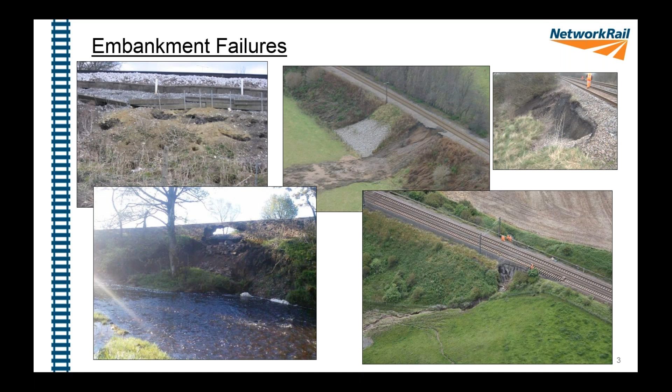Normally I would be able to point and use my hands to show you what I'm talking about, but hopefully you'll get that. So the water came through the cutting and washed out that embankment. Again, I think that was 2012. So those are kind of those examples. We've got some cutting failures, the kind of examples I've got here.

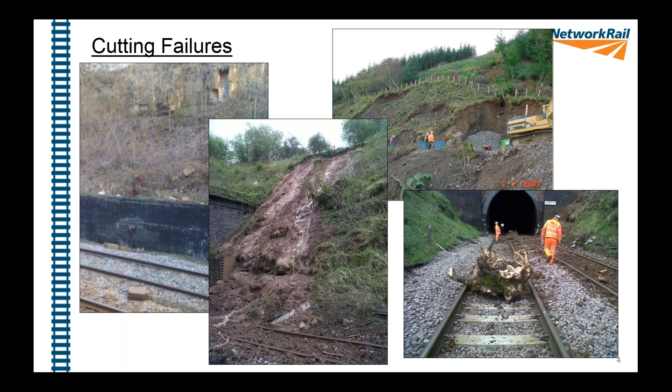So those are safety risks. Obviously, when you have a safety incident, that will affect performance. But there are other issues around performance that maybe we can manage the safety of it, but it affects the performance. So just to remind people about how we measure performance. It combines figures for punctuality and reliability into a single performance measure. And I took this from the website today.

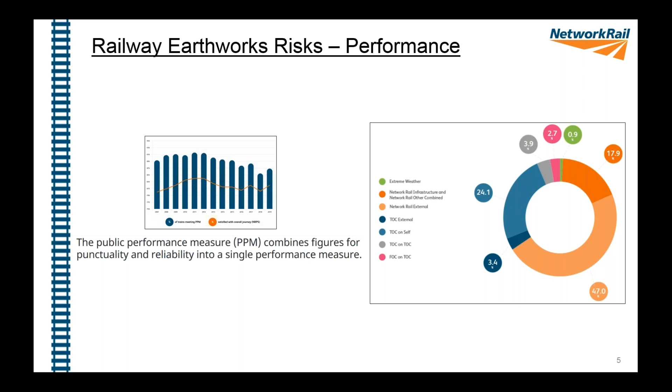So the kind of things that performance impact can be down to that would be part of my world would be extreme weather and then Network Rail infrastructure. So these two definitions here. So when you have extreme weather, that would be exceptional weather conditions beyond our infrastructure design. So typically storm winds could affect us.

The site that was mentioned earlier at Drax, for instance, that was an embankment running through a flood cell. The area around it flooded hugely through February. It was flooded for days and days, but it was flooded during periods of very high wind, and so that caused waves in the bankside, actually causing erosion in the bankside.

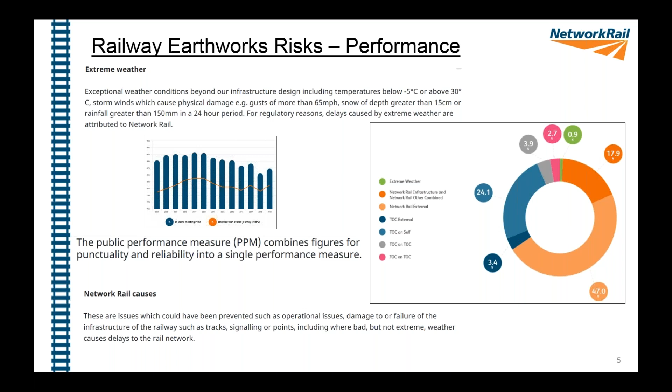So that's extreme weather. And then there's Network Rail causes here, which is to do with failure of our infrastructure. So that's where an embankment may start settling. We can manage it by putting a speed restriction on, like this example here, but the performance impact needs to be managed by my team.

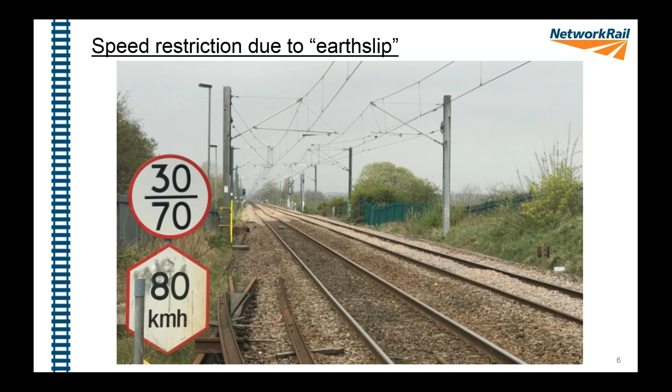And if you think about, okay, you've got these as your assets, how do you manage them? What do you do? How do you count the condition? How do you compare one asset with another? So if you look at that, would you say that's the asset? Would you say that there's two separate assets there?

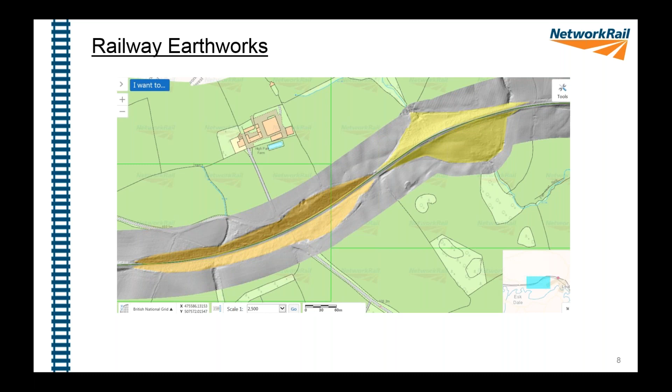Would you say, for instance, that's the whole asset? So it's quite difficult to be able to compare like with like there. So the decision was taken when we were working out how to understand and manage our assets, that we would split them into what we call 5 chain lengths. So that's 100 meters, 110 yards.

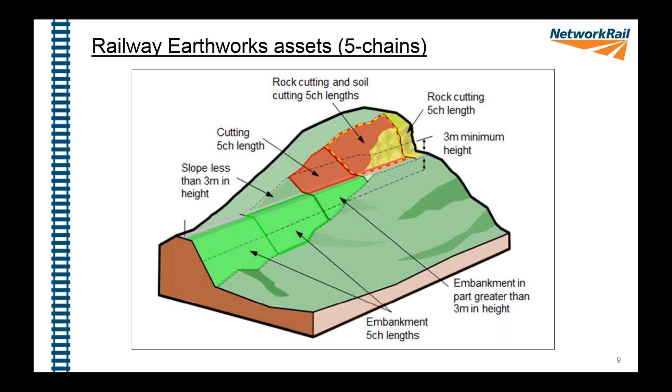We look at them on each of the sides of the railway, and we carry out inspections and gather data on each one of those kind of elements of a whole earthwork, if you like. And that allows us to gather data, to manage inspections, and to manage any work going forward. So that's what we do with those.

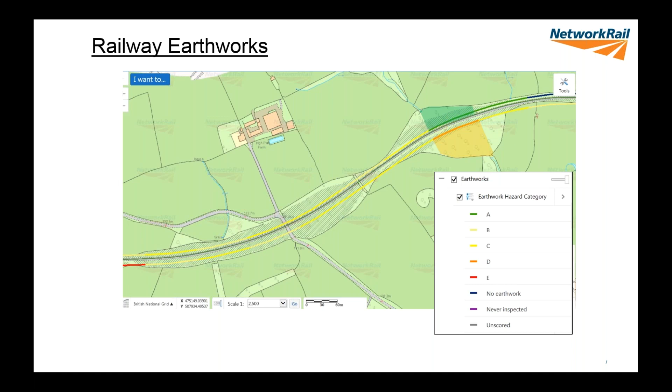And this shows you here how it's split up. So you would go out and do an examination on one of those coloured bits there, and that would be considered the asset. So when I said earlier we've got nearly 50,000 assets, that's what I'm referring to.

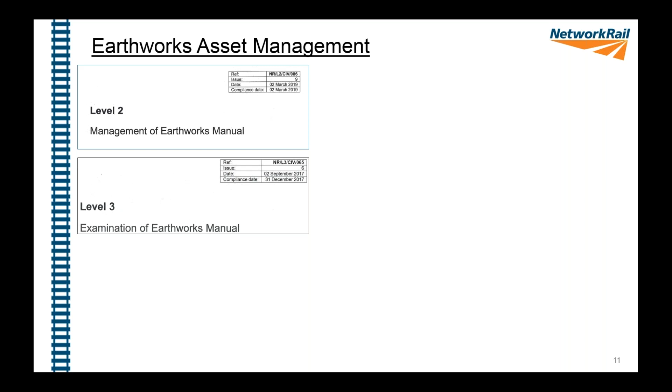So what is Earthworks Asset Management? We've got a management of Earthworks manual, a standard that we work to. We've got an examination of Earthworks manual, and we've got a series of modules that sit kind of within or next to this, which help us manage the risks from our earthworks.

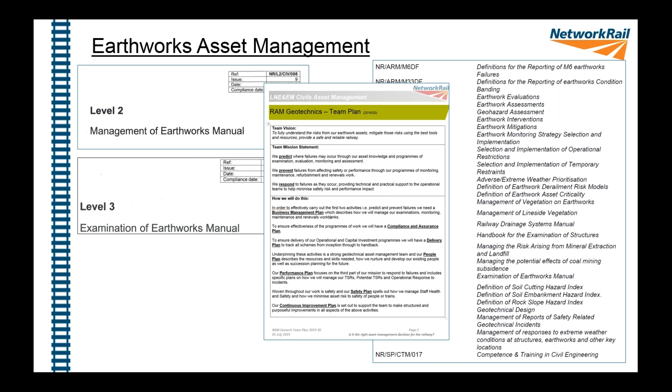In my team in York, we've got what I refer to as our team plan. It's a very high level look at what are we here for and how do we do what we're here for. So just zooming in there, I've got a team vision. My vision is that we will fully understand the risks from our earthworks assets, and we will mitigate those risks using the best tools and resources, and ultimately provide a safe and reliable railway.

And then in terms of our mission statement, we'll predict, prevent and respond to failures in essence. So the idea is that our job is to be able to predict where failures may occur, and we should be able to do that through our asset knowledge, through our programs of examinations, evaluations, monitoring and assessment.

And then we'll prevent failures from affecting safety or performance through the monitoring, maintenance, refurbishment and renewals work. And then thirdly, responding to failures as they occur, providing technical and practical support to the operational teams to help minimize safety risk and performance impacts.

So from my point of view, I keep coming back to this to say, is this what we're doing? Is any work we're attempting to do actually tied back to this? So I'll look at the prediction side of things. In the last couple of years, we've been really trying to work at improving what we do and how we do it.

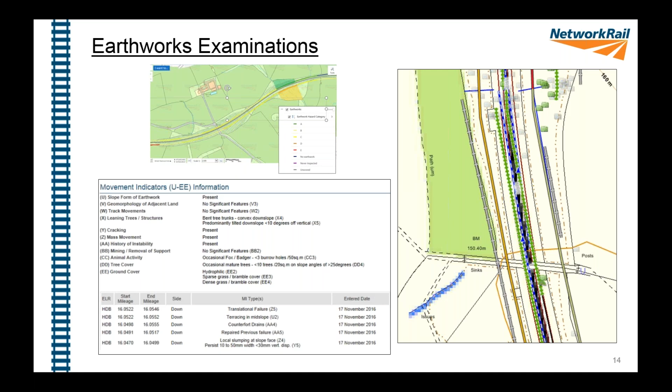So I've got an example of a site here that has a bit of history. There was a track fault, and my colleague, about 10 years ago, went out in response to being told about it, at Riding Mill. During the evaluation of the site, he found there had been history from about 10 years before where a previous repair had taken place. You can see it says reconstruction of the railway embankment, which slipped in adverse weather, along the river South Tyne near Riding Mill. It shows a little as-built drawing we had in our scanned files, with a photo there.

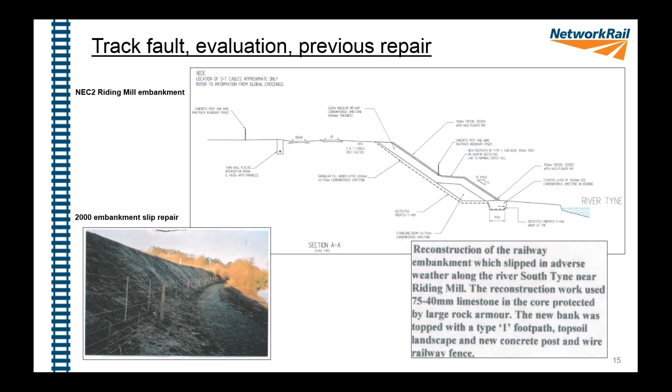He found that there was still a track fault, so being suspicious that this work hadn't properly repaired it, he installed some inclinometers. An inclinometer is a borehole drilled into the ground with a plastic tube installed, and you're able to drop an instrument down the tube at regular intervals to see what depth movement might have taken place over time. So he had those installed.

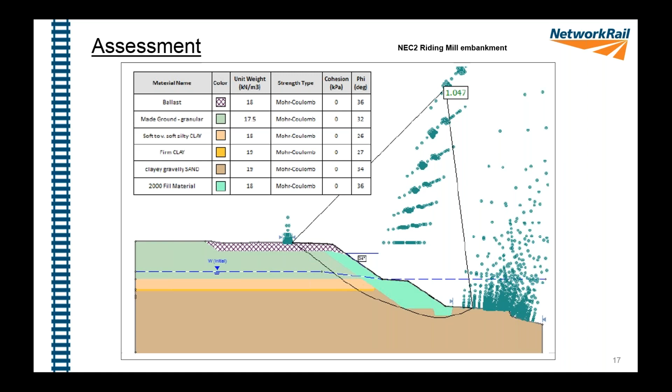We were able to use the information from those boreholes to carry out an assessment very quickly - this is what a slope stability assessment might look like. That allowed us to design a new repair, and I think we installed some more monitoring to be sure the repair was working. So those are some of the options we might pursue on the back of an evaluation.

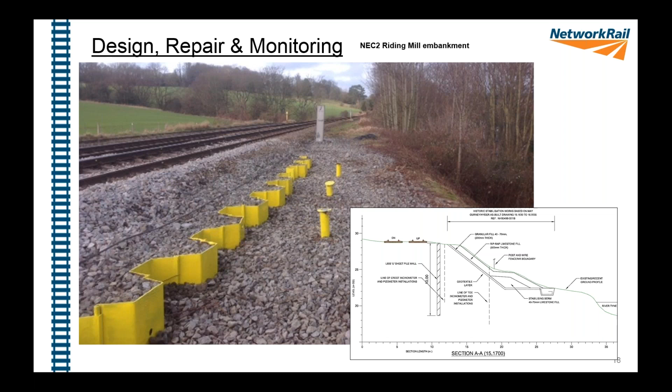This is something close to my heart, the idea of moving our team towards a place where we manage whole earthworks. We've got detailed information for each individual 5 chain length, but I want us to get to a point where we understand the whole earthworks, using those building blocks of earthworks exams and evaluation and desk study information, gathering it all together so that when something happens on a site, we really understand it.

Coming back to my team plan, this is about preventing failures from affecting safety or performance.

I've just got a couple of examples here. Within this asset management system overview, we looked at the bit where we've got an exam, an evaluation, and works being required, the bits in between. We're now looking at the monitoring program.

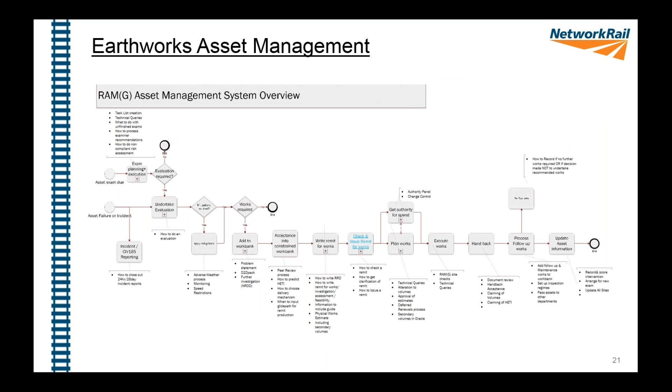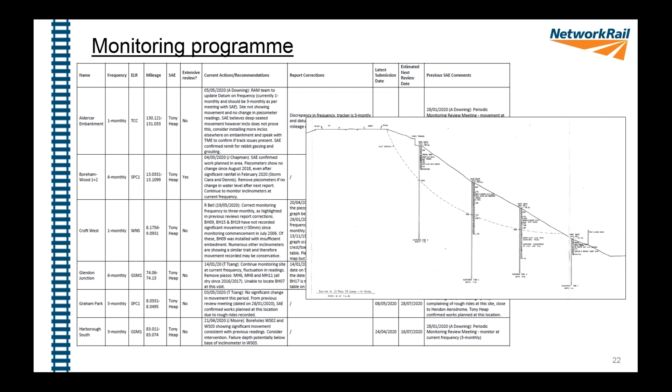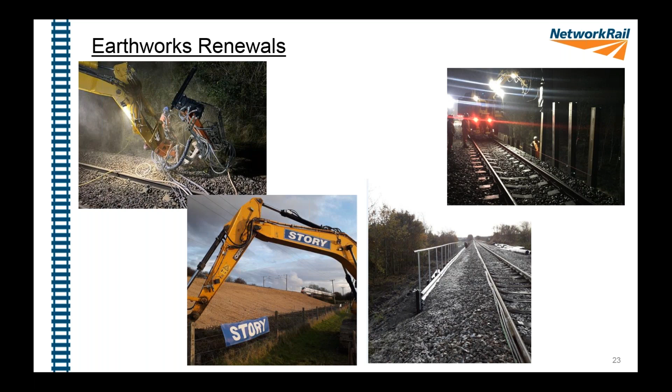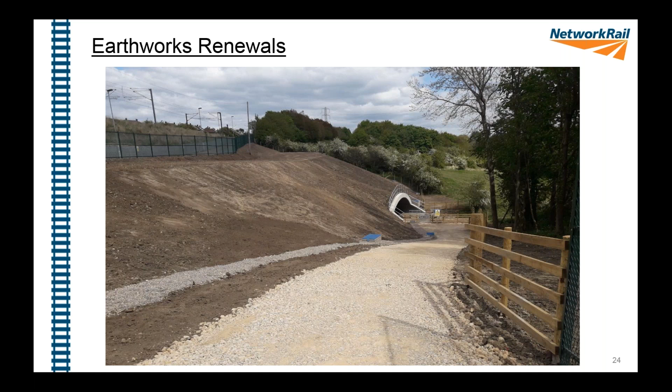This is a photograph of the site I mentioned earlier at Brockley Whins near Sunderland — a very big slope. We ended up having to build out the culvert in order to shore up the embankment. You've got the railway up the top left with the stanchions, then a smallish embankment coming down onto a roadway, and the rest of the embankment coming down. That work just finished on site last month or so.

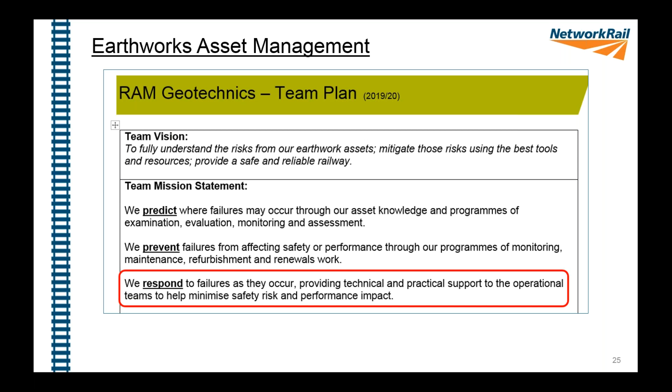Now we're into responding to failures as they occur, providing technical and practical support to operational teams to minimize safety risk and performance impact. I've got three examples of sites where we've reasonably recently helped manage incidents — just a few slides. This first one at Corby Pen Green — I'm not looking at the technical reasons for the failure, but more about what we did in those first 24 hours or so to help manage the incident.

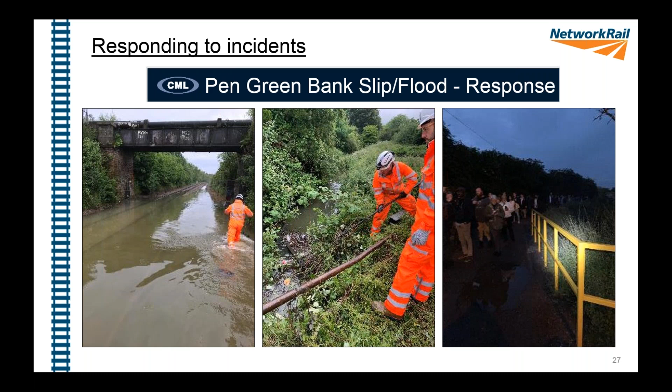As soon as we were aware of the incident, our on-call contractor CML went out to site and carried out work on the stream above the railway, clearing out a lot of material, which improved the situation straight away. They also helped with getting people off the trains, which is what you're seeing in that right-hand image.

This is the bit that I thought might be interesting for people. Our examiners, so we're a reasonably small team, we're based in York and we cover a very big area. As I say, we don't carry out our own inspections and maintenance. So on our behalf, Amey provide an on-call response. So when an incident happens, they will go and visit the landslip, and they will provide a report to us, and they'll liaise with ourselves so that we can understand what's going on.

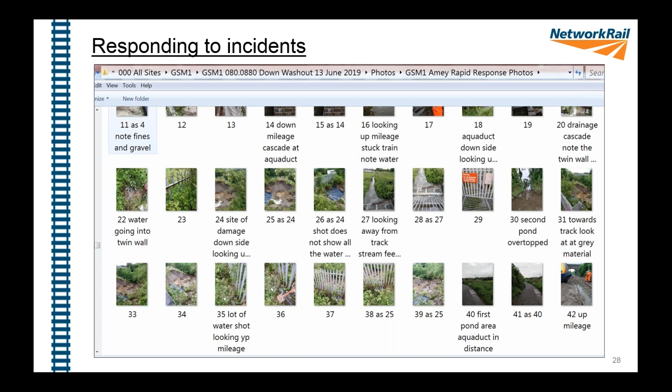They were able to provide all these photographs you're seeing here, which helped those of us sitting in the office, remote from the actual incident, build up a really good picture of what was going on technically, what had happened. It just means that the communication around the incident can be much smoother.

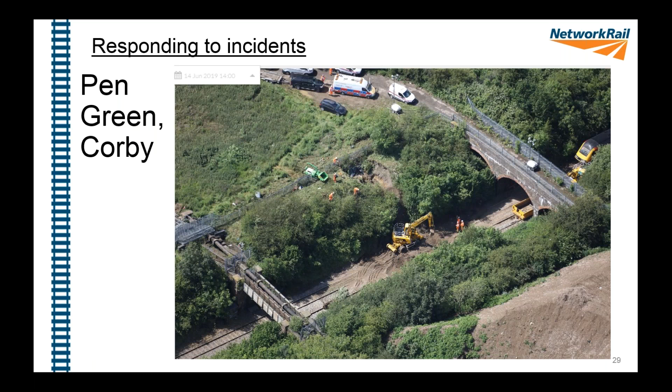So that's that, and there's our contractor on site digging out, starting to get ready to install the repair on the site. So this one is a site at Wetheral, which happened last October. As you can see there, we had a landslip which stopped trains on this line. It was following a period of extremely heavy rainfall and localized flooding, and that landslip was a 5-meter high soil cutting. It's Wetheral, on the Newcastle to Carlisle railway, nearly as far as Carlisle.

In fact, we stopped both lines for that. It was about 5 meters wide, and about the lower two-thirds of the slope which slipped. During that day, we removed the slip material, got ballast bags put in place along the toe as temporary protection, and then we reopened the line the same evening while we continued works to complete the permanent repair, which was stone fill.

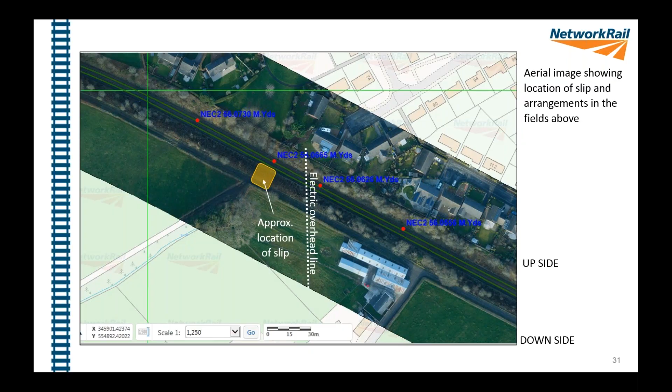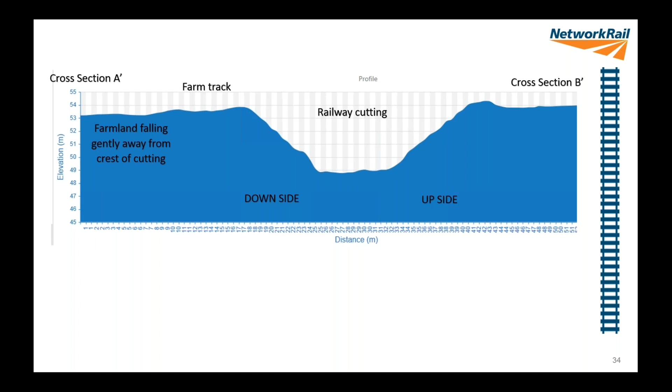Again, I've got a LiDAR image, and it just shows you the farm track there, the stream that's flowing south. So the stream isn't actually flowing towards the railway, but there's issues from a pipe in the area just above the slip. There's a little cross section showing you that we're able to get from the LiDAR, in GeoRINM, which is always quite fun to be able to see.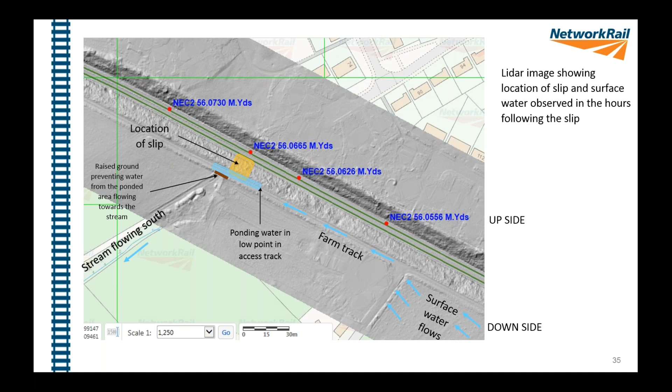Oh yeah, so this shows you what was going on with the water at this site. And again, we were able to build up this picture from our contractor being on site and being able to feed back to us what they were seeing, which allowed us to really understand what was going on. So the surface water flows were flowing up that farm track, and then they ended up ponding up behind the cutting, causing the slip.

So here, this is it. The farm track was knee deep in water when the contractor arrived. We think what was going on was that there was water soaking through the ground and exiting out of the slope face through the sandy layers. It was reported that there was a back scar with groundwater springing from the sandy layer. There was also evidence of overland flow of surface water, and you can see the sandy seepage there as well.

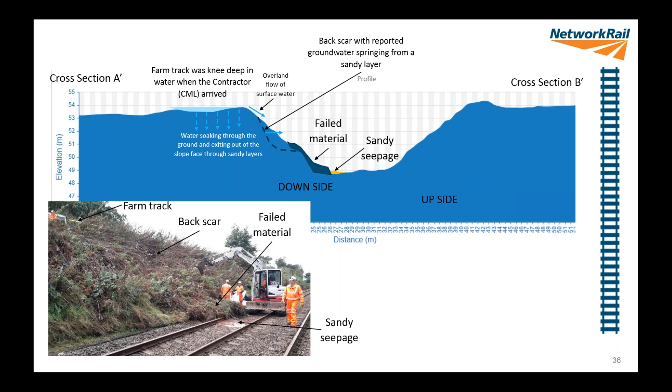Quite like this slide. Okay, and then this is the temporary repair with the ballast bags, and then the contractor continued fixing it while the line was reopened. So that's kind of one of the ways that we try and make sure we get the railway recovered and trains back running as quickly as possible and safely.

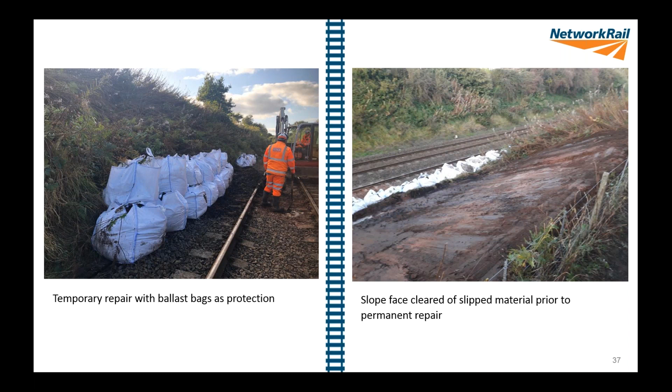Then this one is the most recent slip. This has just happened last Friday. We were first told about it on Friday afternoon. It was reported by the local maintenance team as erosion of the ballast shoulder.

The embankment is near Frodingham Viaduct in Scunthorpe on the Down line, near the 21.5 mile post. If anybody knows Frodingham Viaduct, it's just along from there.

At that stage, an emergency speed restriction was imposed, and following a visit by our contractor and an AME examiner, it was decided we would keep that ESR of 5 miles an hour in place and put a watch person in place until further notice.

The ballast continued to erode over the weekend, in particular in response to freight trains going over it, and it was decided to stop all traffic on the down line by Sunday the 14th of June.

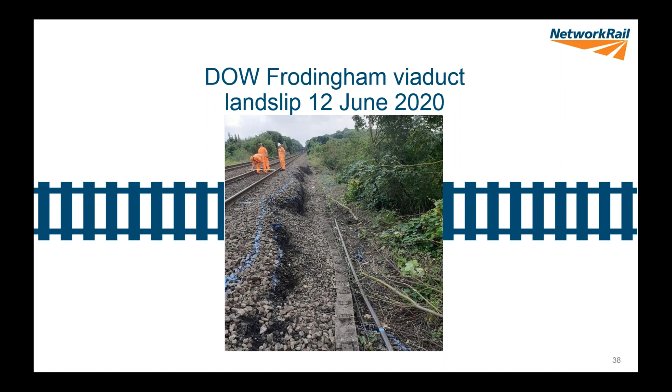The embankment is very steep and heavily vegetated. You can see in this image the dense vegetation here, and you could probably just make out the road below, which is called Brumby Lane.

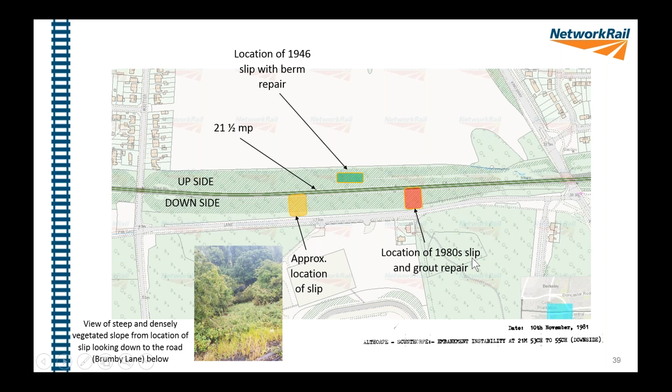We found that there was some history here. It's quite evident in the LiDAR image - you can see at the toe of this slope what looks like an old berm repair, which we believe, from our first go through the old soil mechanics files, is the slip that happened in 1946.

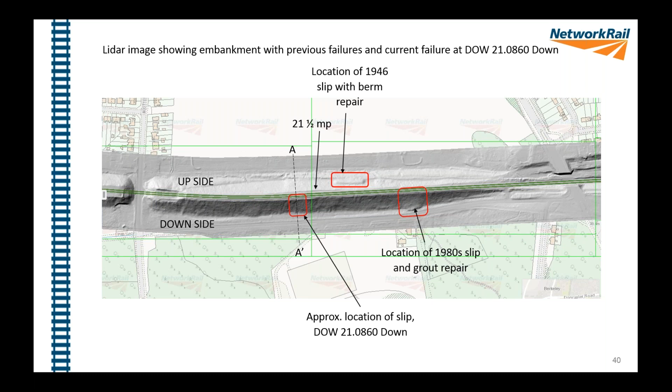You can see that the ballast shoulder is getting very close to the 300 mil, which was the limit that was set for closing the line anyway.

In our little cross section, I've done a likely failure surface. We're not really sure about that for certain yet. But the next image, the one I showed you earlier as well, it's likely to be something like that.

We've installed monitoring at the site. As I say, we stopped all traffic on Sunday on that line. We've now stopped all traffic on both lines so that we can get the piles installed as quickly as possible.

They're going to be working 24/7 to get the piles installed so that we can reopen the line, and then we'll work on whatever other repair is needed below those piles, whether that takes the form of a stone berm or anchors or something. We're still working that through.

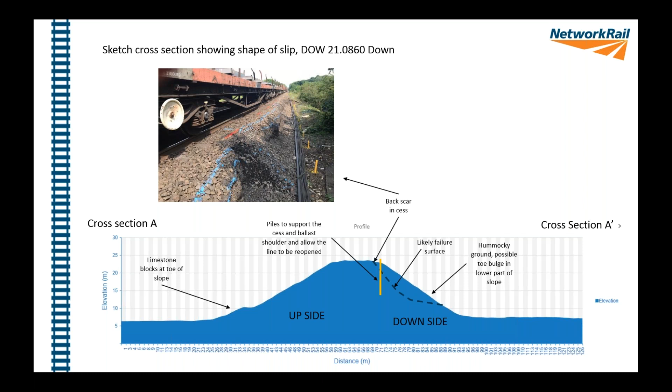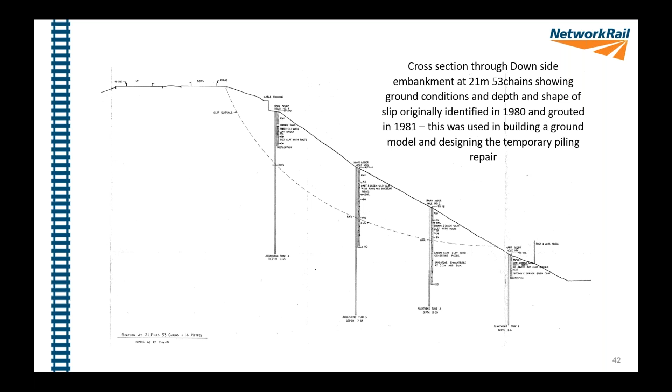We'll be working on that ground model over the coming while. So those were my three examples of slips that happened and the work that my team do, and our contractors and suppliers do, to try and get the railway reopened as quickly and as safely as possible.

For the last little section, I just want to talk about some of the continuous improvement stuff that we're doing. The first one I mentioned earlier about the management of whole earthworks, so that continues to be a work in progress.

The other thing that we're doing, which I think is going to make a big difference to how we manage things, is that we're creating separate maintenance and renewals teams. To date, our teams, the senior asset engineers and the asset engineers, have been responsible for the kind of day-to-day maintenance and responding to queries and dealing with neighbours, etc.

At the same time as they're trying to understand a historic problem, write a remit for a £1 million job, and manage the delivery of that with our deliverers. It's not really possible - you can't do both of those things at the same time. If you get a call from control, you have to drop everything and deal with what's happening on the ground.

So we're moving to having separate teams and separate processes as well, which I think will really help.

So then the last 3 things are some of the stuff we're doing around improving our response to incidents: developing a potential TSR register and actively managing that alongside our track colleagues, the landslide detection alert system which is underway at the moment, and locally we've changed and improved how we prepare for and respond to adverse weather.

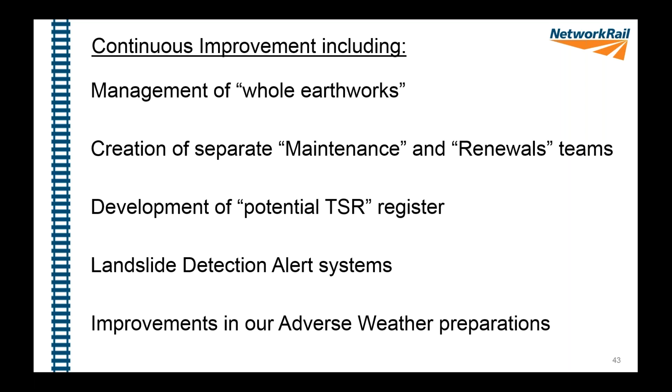So I'll just talk about these 3. The potential TSR list idea is that our team will have a register of all the locations we're worried about, with a management plan for those, which we review on a regular basis.

It might include some of the hot weather sites that track deal with year by year, sites going into our renewals work bank for the future, some monitoring locations we looked at earlier, and some of the clay desiccation sites we get in those clay banks in the south of the region.

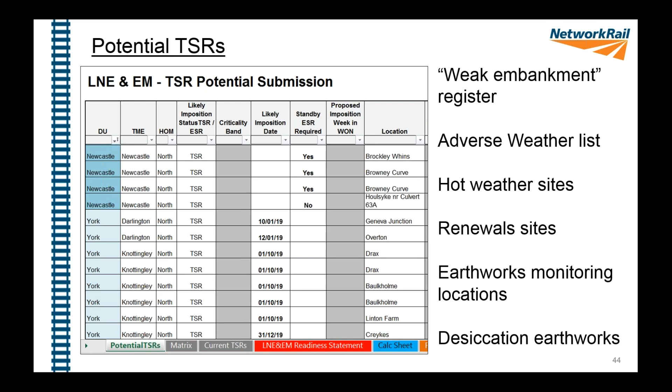So then the landslip detection trial - this is the system. It's got 2 banks of wireless tilt sensors spaced 2.5 meters apart, with a centrally mounted pole, logger, cameras, etc.

The tilt sensor data is sent back to control, where if there's alerts or alarms generated, they come via text and email. They've got camera images as well, and the intention is that it will help prevent trains encountering a landslide.

So if the embankment or cutting starts to move, we'll be able to tell quite quickly and be able to stop trains - that's the intention of it. We're going through the trial for that at the moment.

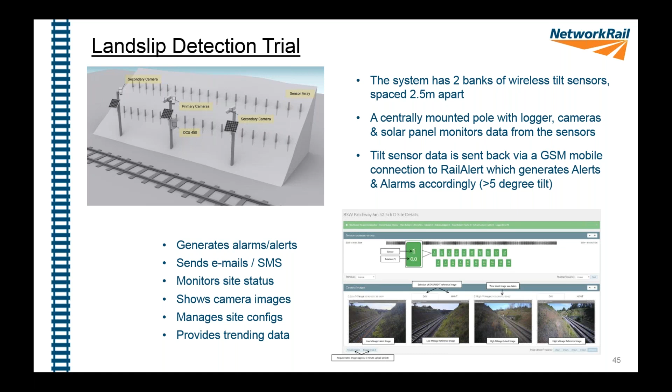Here's an example - if you're out and about and you see these yellow sticks, that's what you're looking at. They generate alarms directly to control, and the alarm can cause trains to be cautioned. For those of you out and about trackside, please don't interfere with the site structure or equipment without speaking to control first - don't hang your coat on the poles - there should be contact details next to it.

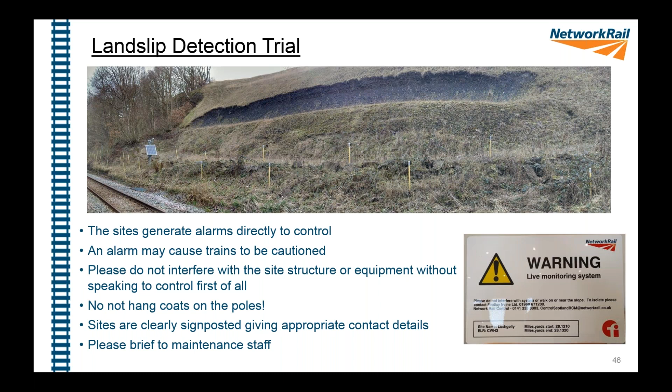And that's that. In terms of our adverse weather and what we've changed in the last year or so - we used to depend on the local maintenance teams to visit our sites that we were concerned about.

So we've got a list of earthworks sites that individually get forecast for rain against them - the ones you're looking at in red are forecasting very heavy rain. We used to go on the EWAT with control and the local maintenance teams, give them the list of sites and hope that they would be able to visit them.

People really struggled with that, because if it was a high rainfall time they were probably off visiting a number of other flooding sites, or might not be able to get to it, or had limited resource. So thinking about the fact that we are our own maintainer and have contractors who know our earthworks assets really well, we've moved to using them to do those visits on our behalf.

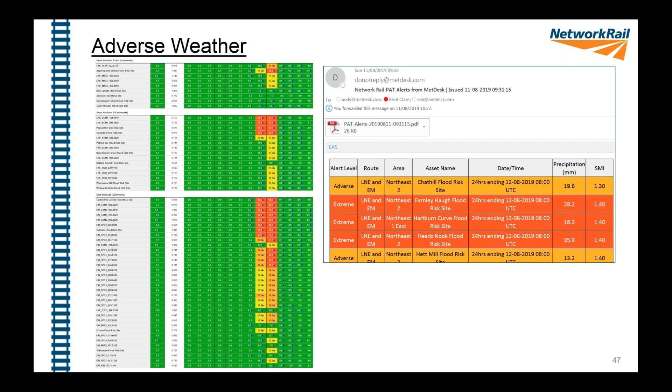So this is an example of a period of adverse weather where we identified these specific locations, including Corby Pen Green, for example.

The table that we send out to our contractor will give each of these locations - it'll say what the risk is, and there'll be specific remits to go with each of these as well, so they've got a map and know what they're looking for. But this kind of summarizes it.

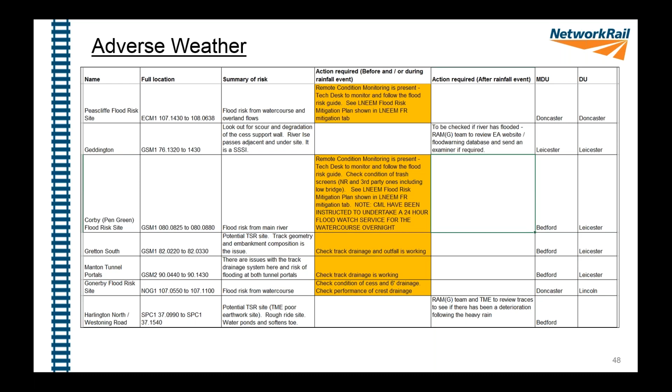So what we do is raise a fault with control for each of those sites to be visited, and then they go out to visit and provide us a report with photographs and recommendations, etc. One of the issues previously with using local maintenance teams was we missed that feedback loop where we'd get information back into our systems, whereas with this it really does help us understand a site better.

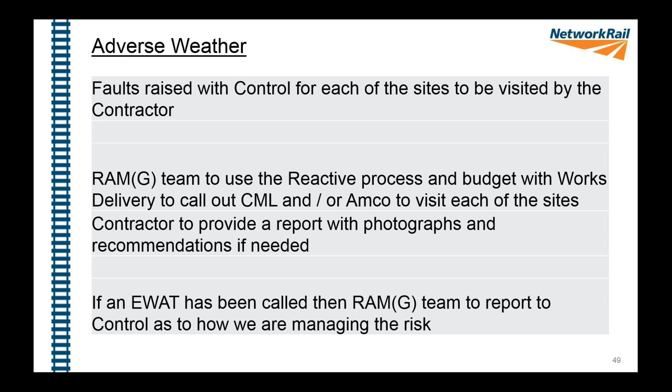So this is one example where that's been very effective, on the Newcastle Carlisle line. Frequently you would get the line being stopped due to water coming down at these culverts.

So we've been sending our contractors out, and they've been clearing them up in advance, and it has been working really well, and been able to feed back into our asset management systems. And that's the end. Are there any questions?

I have a couple of questions. The first one is from Bill Free. I am surprised to see how you define an asset. I would have expected you to be considering a cutting or an embankment as a whole asset, since a lot of the issues along any given cutting or fill will be similar.

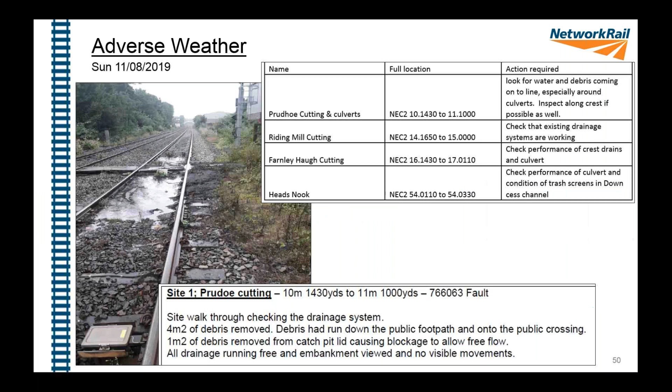Yeah, so we do, and for instance that site at Riding Mill, we did have ground investigation information that we had done, but the information we've got today does tend to be in response to either an incident or being told about something. One of the things which I didn't mention earlier, I'll see if I can find it because it's probably worth looking at. It's in my Earthworks Management Plan, and it is in here, right?

So we've got something called the GSRA, Global Stability and Resilience Assessment, and it's something that Milton Keynes kicked off on our behalf. I can't remember if it's like a level 0 assessment of each earthwork, and it uses the LiDAR information, the angles and the height data, and the geological information. So you can have a very simple ground model using that, knowing either what geology a cutting is cut through, or the most likely geology that the embankment was built on, depending on how close it was to the nearest cutting.

And we're using those as part of our desk studies when we're doing these earthworks management plans, and I think there's a lot more we can do with those to build them into what we do. So again, I hope I answered that question. I may have rambled a little.

Thank you. And the last little bit, if there's time, Kevin, apologies. The LiDAR terrain models appear to show some very useful information. Is that something you'd see as a routine inspection, perhaps, going forward to look at changes? Certainly some of the toe bulge and start of rotational slip seems to be evident in some of the LiDAR images you showed.

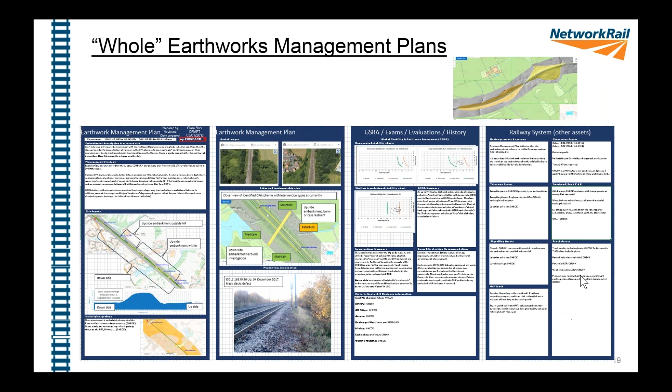You kind of think, okay, is that climate change? Yes, we have had a really, really wet year. And the assets are continuing to degrade. They were built 150, 180 years ago. They would be life expired if you counted them that way. I think we are also better at recording the incidents now than we were before, and that may account for some of that possible increase.

And I think climate change definitely will affect it. You've got higher rainstorm events, more intense. It's windier, colder, wetter. It will do. Again, I'm not sure I answered your question there. It's very difficult.

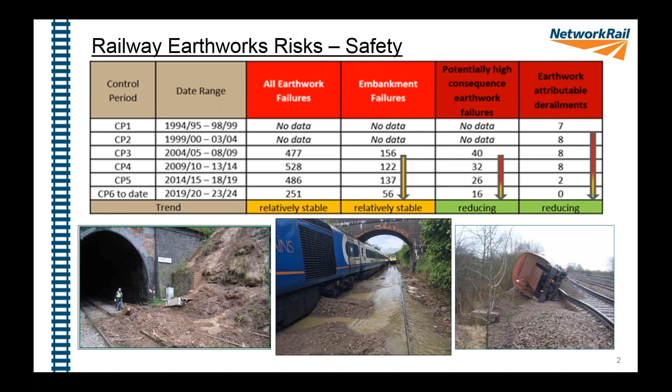Thank you, Kevin. I think I'll put my camera on as well. I don't know if that'll work or not, but I hope you can all hear me okay.

Claire, it was a wonderful presentation, and you've come a long way from where Andy Savage and I were when, as civil engineers, we did our best, but we weren't great at it, and we had a little bit of expert support from some really good people in BR Research, but looking back, it was totally inadequate.

Looking at how you approach it now, I really like the way you linked your slides to your team plan - predict, prevent and respond. Thank you, well done for that.

I know I've got a slide myself of Corby Tunnel, which I think was known as probably the wettest tunnel in the country. Every time we wanted a picture of something flooded, we used to wheel it out. So those problems around Corby with drainage and earthworks are still challenging you, and certainly challenged us in the past.

I'm glad there's so many people on the presentation as well, because I want all our young developing engineers to understand the challenge of managing earthworks, because anyone who's out on the railway will see it. You can't help but see it.